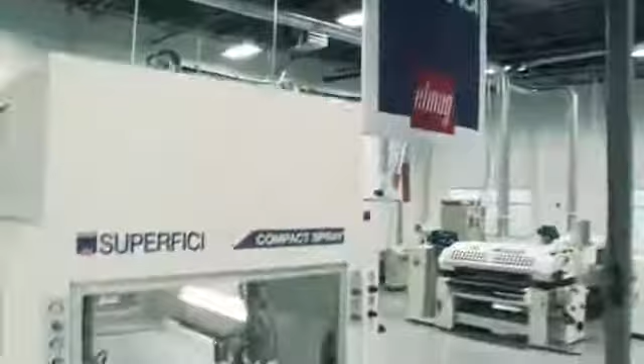I'm the product development manager for the company, and this morning I'd like to demonstrate for you our Compact Plus spray machine. It's a fully functional PLC controlled machine that has all the features of much more expensive equipment.

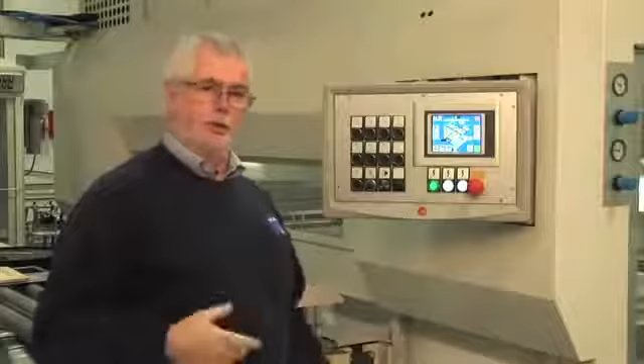We'll start with the heart of the machine, the control panel. This is where the operator is going to carry out all the functions to run the machine day by day. I'd like to show you how easy and intuitive the machine is and how simply we can change from stain to top coat, backwards and forwards, as our production day goes on.

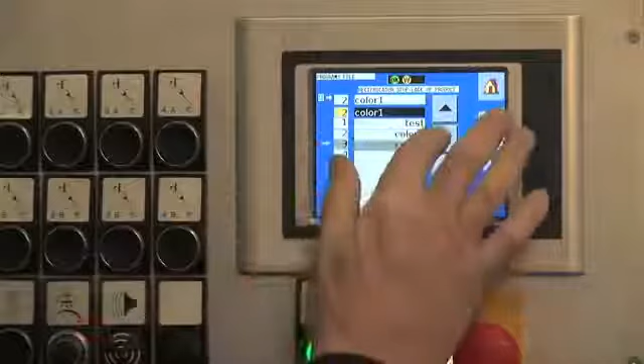We'll start by spraying a door. First we select a recipe. We're going to spray colour 1. We load the colour. The machine is ready to run.

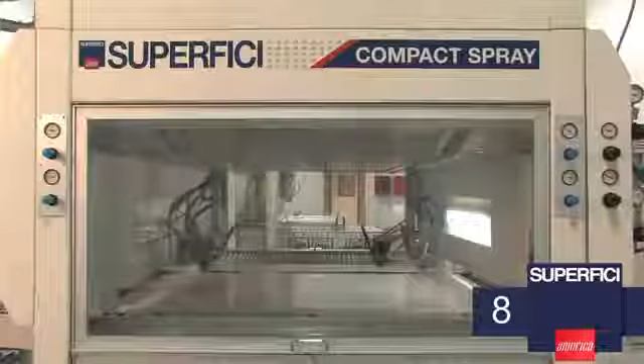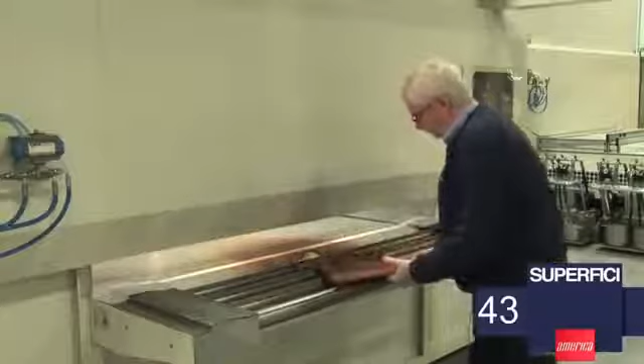Okay, so now we have the stain coat. We now take this to dry and we can seal and top coat.

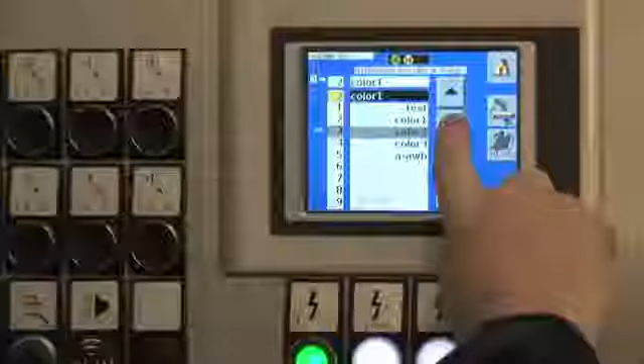Okay, so now we've stained the panel. We've waited 5 minutes for it to dry. Now we're going to reprogram the machine and set it to clear coat. We simply change to the recipe for the clear coat, load it, and we're ready to go.

Although being simple to work with, it's also extremely powerful. We're able to make fully customizable programs from the interface on the machine.

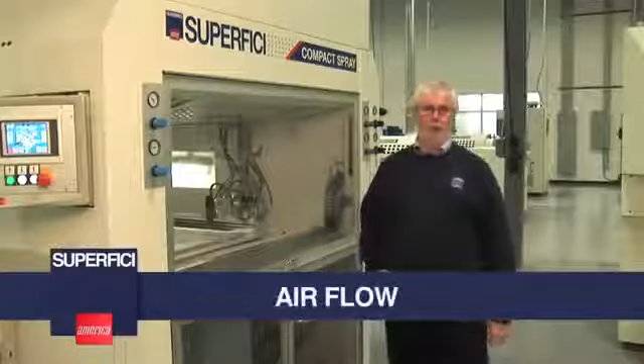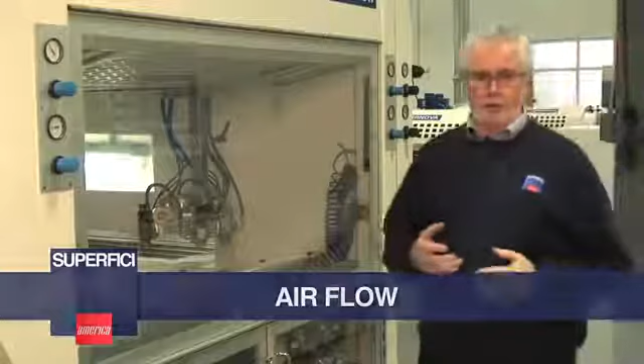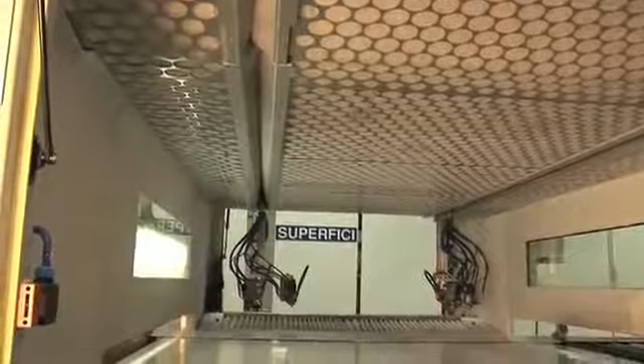When considering the benefits of a flatbed spray machine, one of the key features to look at and pay attention to is the airflow inside the machine. Airflow must be controlled and balanced in such a way that it maximizes the overspray recovery, and it also ensures a safe working environment for the people operating the machine and around it. If we push the overspray down on the belt, we're able to ensure we get the best possible finish from the spray gun. We're also able to get the best possible yield from the material.

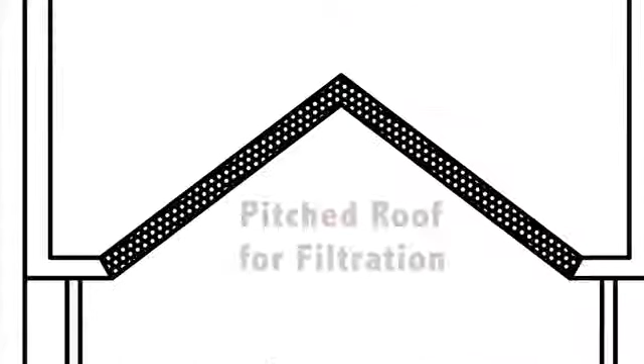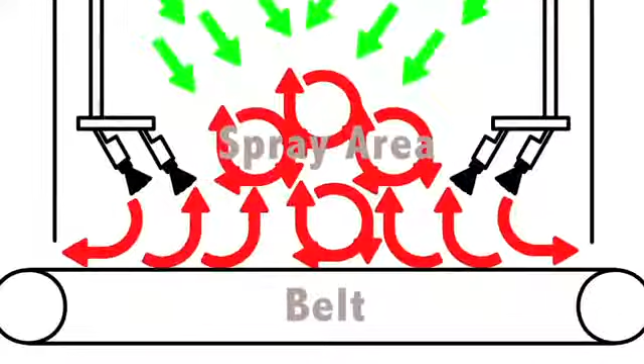Our competitors offer a machine that has a pitched interior roof to the spray area. We don't believe this is the correct solution, because with forced air this will cause turbulence exactly in the area where the spray guns are applying paint to the workpiece. This is the area where you need the machine to have the most controlled airflow at any stage in the process. We want the overspray on the belt, not on the side filters.

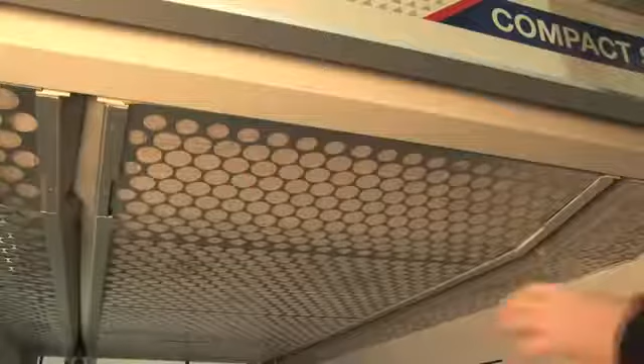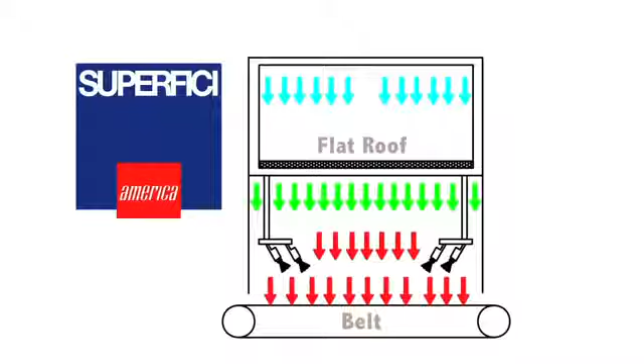When it goes to the side filters, it costs more money. The Superfici range of machines all use a flat interior roof to the machine. The reason for this is that we can ensure we have a balanced and even airflow to the whole zone of the spraying area. There will be no difference in spraying the workpiece at the entry as there will be at the exit. The whole machine is completely balanced. When it goes on top of the belt, we're able to either have more on the workpiece or we're able to recapture it through our recovery system.

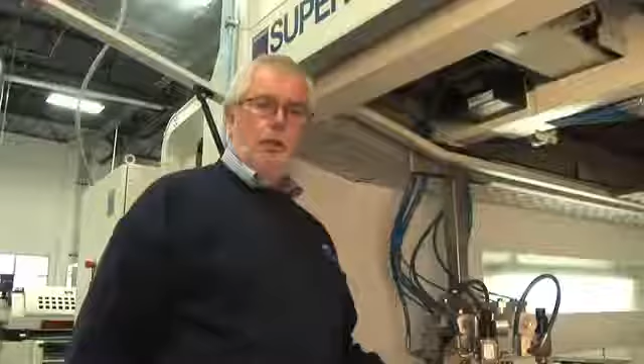Another key feature of an automatic spray machine is to consider how the fluid is delivered to the spray guns. It's very important that you get as even pressure and as controlled flow rate as possible through the spray gun, to enable each gun to give the same amount of fluid onto the workpiece. Many of our competitors' machines do not operate a full closed ring system. This can lead to great inaccuracies in the amount of film applied gun by gun. We avoid that by having a closed ring system.

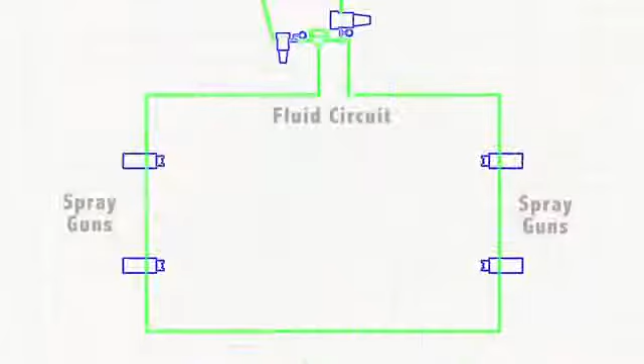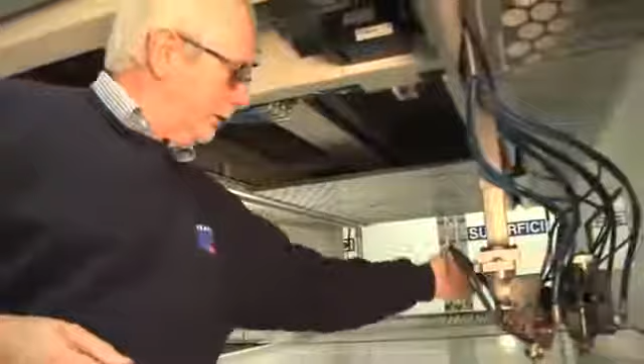By closed ring, I mean that we actually have a daisy chain circuit and we put fluid to both sides of the ring so that we're able to give equal pressure to the left and to the right reciprocator. We do that by having material coming in, coming down, through to the spray gun, from one gun to the next gun, from that gun back up, across the bridge, down to the other side of the machine, across this gun to the back gun, and from the back gun back across the bridge and down through the energy chain back to the exit of the machine.

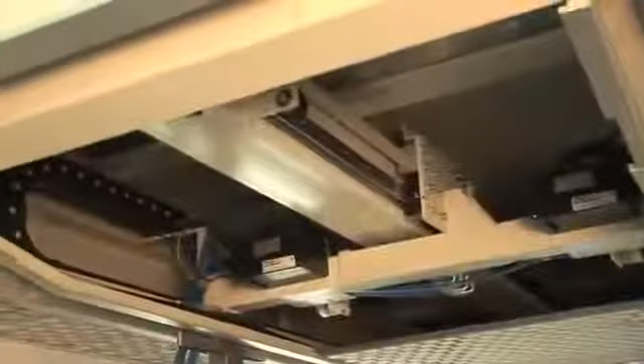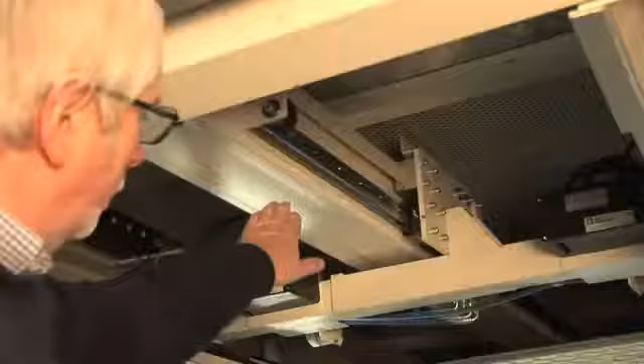Another unique feature of the Superfici range of spray machines is that we do not use a standard extruded aluminum reciprocator mechanism, which is typically bought from third-party vendors. Within our group, we have manufacturers of CNC routers. They have designed for us a linear bearing system mounted on the beam, the same as a CNC router.

So this mechanism is extremely rugged. It is designed to take far heavier loads than ever can be put on a spray machine. This is a very reliable feature of the machine. It's also an item that gives very good precision when spraying.

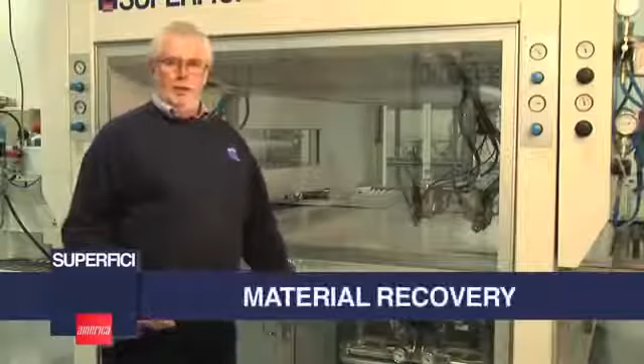The Compact Plus spray machine is a material recovery machine. It's really important to have the material back in good, usable condition. With our patented wet system, we really do have the best system available to give you the material back with the least stress on the material, the least use of solvent, and the best rate of recovery.

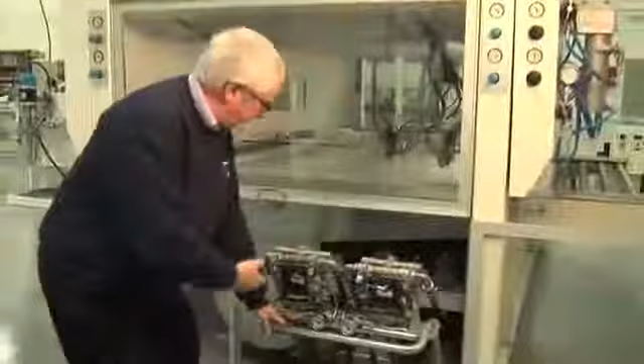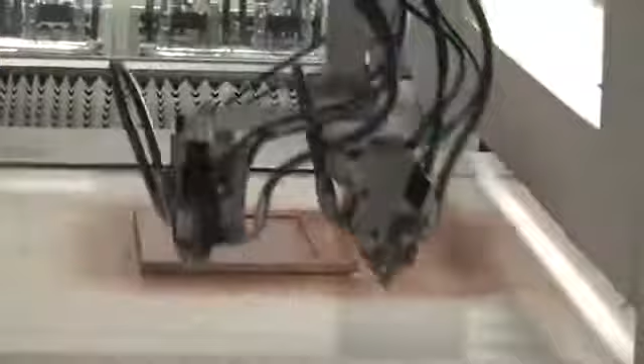What do we mean by a wet system? If you imagine the workpiece has been sprayed, there is overspray around the perimeter where the workpiece is now left. With our wet system, we do not remove any material with the roller. To the contrary, we apply paint on the belt.

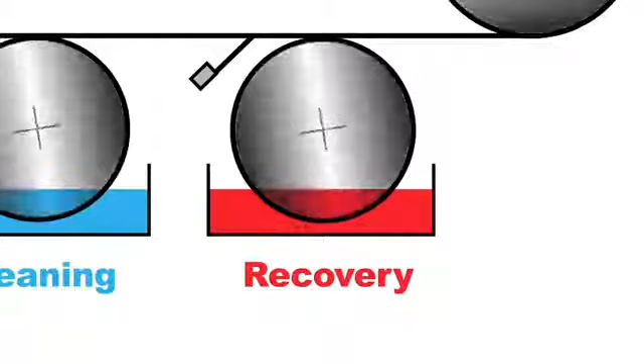The recovery roller is running in a trough of whatever you're spraying, water-based UV, paint, whatever. As the roller rotates against the direction of the belt, it's in contact with the belt, but it is not pushed hard into the belt.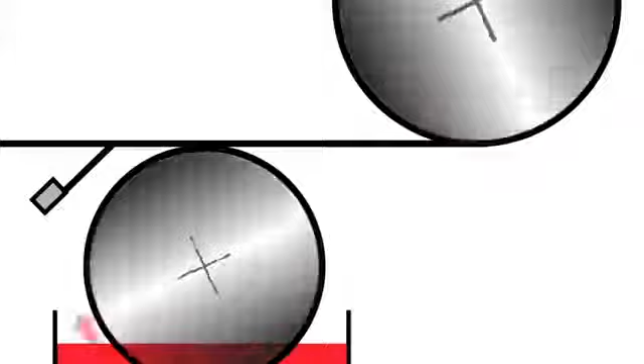The surface of the roller has very, very fine texturing. Not enough to damage the face of the belt, but enough just so that when we bring the wet material up, we make it mingle with the overspray. So now the belt is covered in a homogeneous mass of coating.

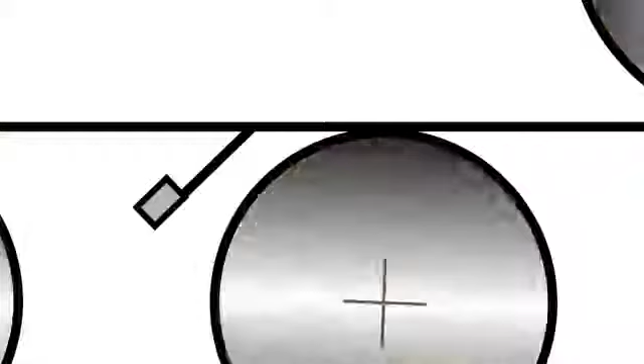That allows us then to use just the one scraper blade to remove all of the coating and put it back to the trough. These are two completely independent units. This one is for paint recovery. This one is for final clean of the belt.

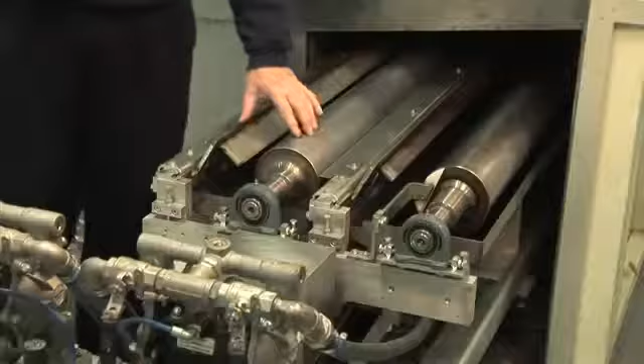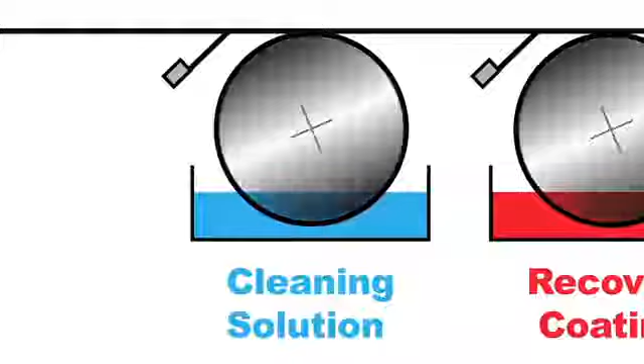Again, it's working on the same principle. The solvent through the trough, the roller rotating, lifting it onto the belt, the scraper scraping it dry. As soon as the belt has passed the scraper, the belt is dry, ready to receive the next workpiece. There is no carryover of solvent beyond this scraper.

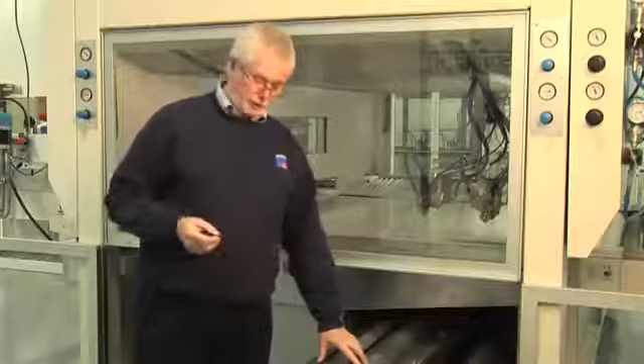So we're able to use very, very slow solvent. This means that typically with our competitors' machines, they would be using between 20 and 40 gallons of solvent in a shift. We will use between 3 and 5 gallons, no more. The wet system for material recovery has proven to be one of the most profitable and significant gains to any of our customers when they have a Superfici spraying machine.

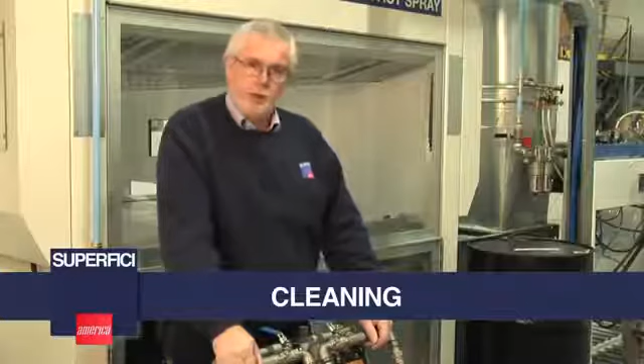When customers look at this system, the first question they ask is, how difficult is it to clean and how long is it going to take me? When we designed this system, we designed it for ease of cleaning. Everything is removable. The trays can be removed, the scraper can be removed.

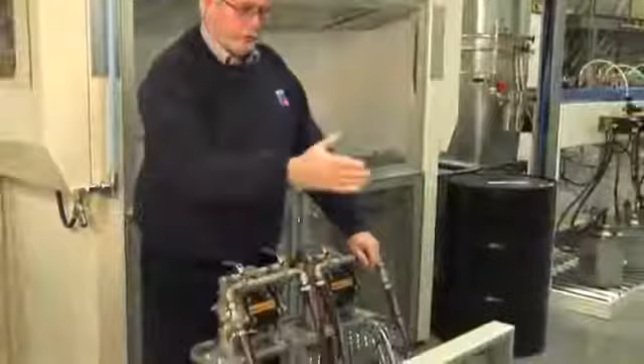To remove the trays, you simply have to drop the tray, undo this one fluid connection, and the tray can come out.

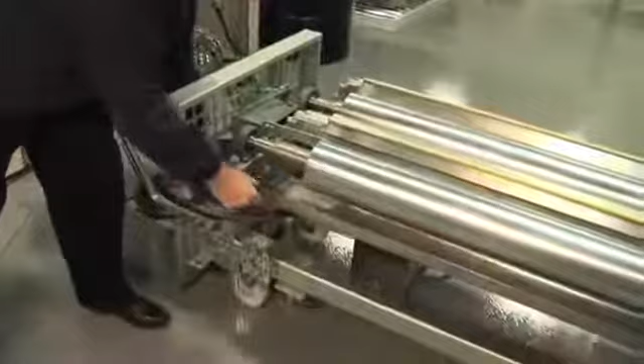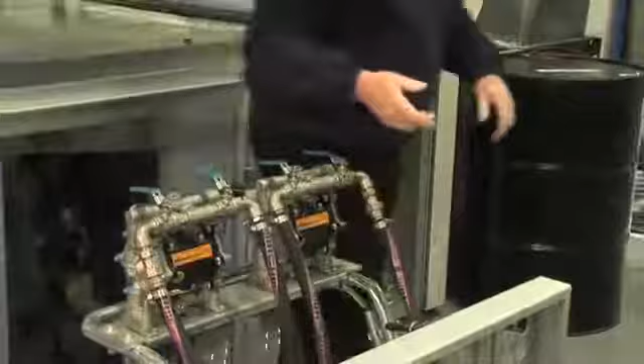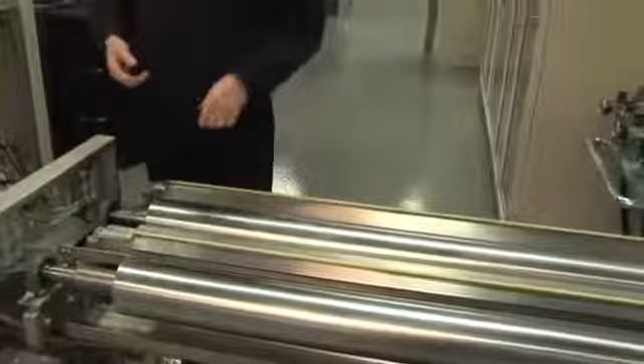To clean the scraper blade, it simply lifts out. You lift the scraper blade out, take the scraper off to a remote place, give it a clean. If time is really important, then it's possible to buy spare scraper blades, spare trays, and you can have one set cleaned while one set's running.

Typically, the time to clean this unit would take between 15 and 20 minutes at the end of the shift.